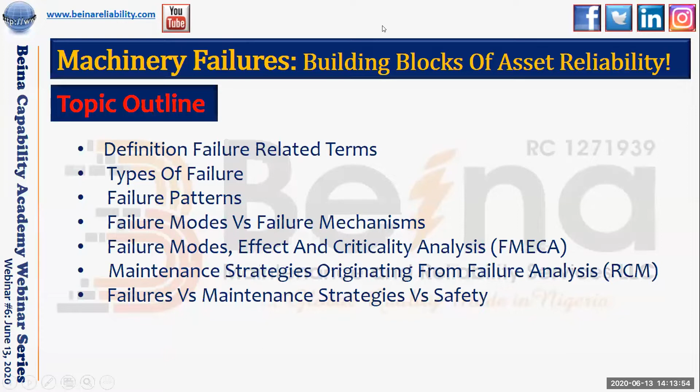Okay, failure: inability of an equipment to perform according to requirements. Somebody says loss of function. Somebody says failure is the loss of function of an asset. Failure is the inability of an equipment to meet demand. Good responses. The ability of machines not to pass NDT. Good, good, good, good. Okay, let's proceed.

What is failure? Failure is the inability of an asset to perform one or more of its intended function. The inability of an asset to perform one or more of its intended function.

Now, let's go to function. Function is defined as the purpose for which an asset is designed. This is first defined by the OEM, but most often redefined by the user. By the way, OEM means original equipment manufacturer, or better still, you could say designer.

So an asset can be said to have failed only if it is unable to perform its intended function as defined or as determined by the user of the asset. What do I mean? Now, I am a designer and I designed a bicycle. For my design, I have designed that bicycle to carry just one person. Now, you as a user buy my bicycle and you say, no, I don't want to use this bicycle to carry one person, I want to use it to carry two people. Now the function of that asset has changed because the designer designed the bicycle to carry one person, but you are using it to carry two people. So your expectation from the bicycle is that you are able to carry two people, right? So until you get to a point where you are unable to carry two people on that bicycle, you will not say the bicycle has failed. I don't know if I'm making sense.

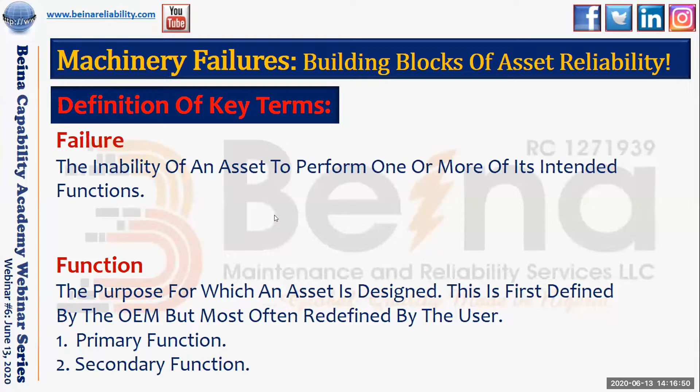I have two phones. I have a Nokia 3310 and I have a Samsung S20. For me, my Nokia 3310 is for phone calls.

But my Samsung S20 is for photographs and for social media. I want to be able to take photographs with my Samsung S20. I want to be able to surf the internet with my Samsung S20. Now, if I am unable to make phone calls with my Samsung S20, it doesn't matter to me because that is not the function of the Samsung S20 as defined by me.

Yes, Samsung S20 has the capability for phone calls as designed by the manufacturer. But for me, I bought this Samsung S20 so I can be able to take photographs and I can be able to surf the internet. So until I am unable to take photographs with my Samsung S20 or I am unable to surf the internet with my Samsung S20, I cannot say my Samsung S20 has failed.

I believe I'm communicating. Now, for my Nokia 3310, the primary function of my Nokia 3310 is to be able to make phone calls. So as far as I'm making phone calls with my 3310, everything is fine. The only time I can say my 3310 Nokia has failed is when I am unable to make phone calls with it.

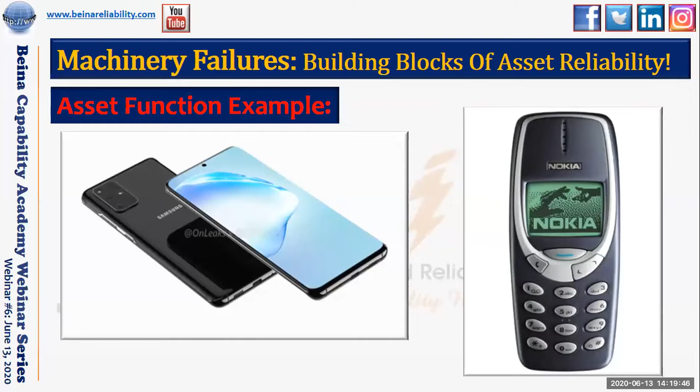What is reliability? Reliability is defined to be the probability that the component, system, or asset will perform its required function as defined by the user. Note the word user. User is coming in now. For a given period of time under stated operating conditions. If you look at the definition, three areas are highlighted. Let me use my cursor to highlight this. Three areas are highlighted: required function as defined by the user, period of time, and then operating conditions.

It is absolutely impossible to define reliability without these terms. So you can define reliability anyhow you want, but these three terms must be part of the definition: required function as defined by the user, period of time, and then operating conditions. Now, these acronyms, MTTF and MTBF, are measures of reliability. We're going to see them as we proceed in our definitions.

Now, the reliability of an asset can be achieved throughout the equipment life cycle. That is from design stage to fabrication, to installation, to operation and maintenance, and to decommissioning. And we must note that decommissioning does not necessarily mean the end of life of an asset. An asset can be decommissioned from point A and reinstalled in point B. Very important to note. So when we say an asset is being decommissioned, it does not necessarily mean that the asset is no longer useful or has come to its end of life.

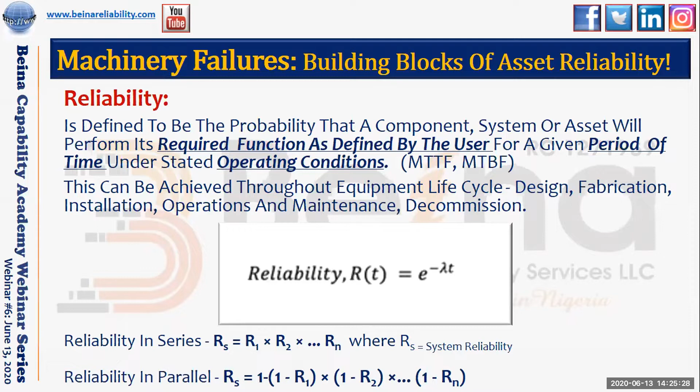Okay, failure rate. Failure rate is defined as the number of failures per unit time. And failure rate is also known as lambda. Whenever you see lambda in reliability, they are making reference to failure rate. And this is the mathematical model for failure rate: number of failures divided by total operating time. Very important. And failure rate could also be the inverse of mean time between failure, we're going to see this later, or inverse of mean time to failure.

Let's look at this example. 20 air conditioning units designed for use in NASA space shuttles operated for 1,000 hours. One failed after 200 hours and another failed after 600 hours. Now, we are going to be looking at failure rate in percentage and failure rate in number.

Now, for failure rate in percentage, you're going to look at the number of failures, which is 2, divided by number of units in the experiment, or number of units under test, or number of units in the mission, which is 20. Then you multiply by 100 to make it a percentage. So 2 divided by 20 multiplied by 100 is going to give you 10%. So the failure rate of this system in percentage is 10%.

Now, failure rate in number. 2 here is number of failures, divided by 20,000, which is 20 units multiplied by 1,000 hours. So this is supposed to be your total operating time, but you cannot just use this as total operating time, because you started with 20 air conditioning units, but you did not end with 20 air conditioning units, because 2 air conditioning units failed before the end of mission, or end of experiment, or end of test.

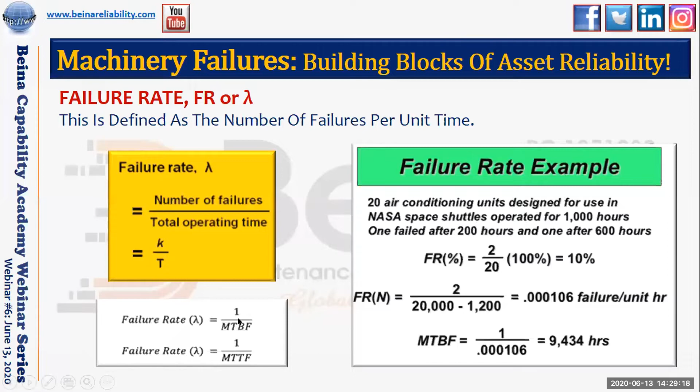Number of failures divided by total operating time is failure rate. And failure rate is equal to inverse of mean time between failure and inverse of mean time to failure. I'm going to explain the difference between this and this as we proceed. Okay, now mean time between failure. This represents the average time between failure events over a specific period of time. What this means is, in the next 10 hours, how many times does this asset fail?

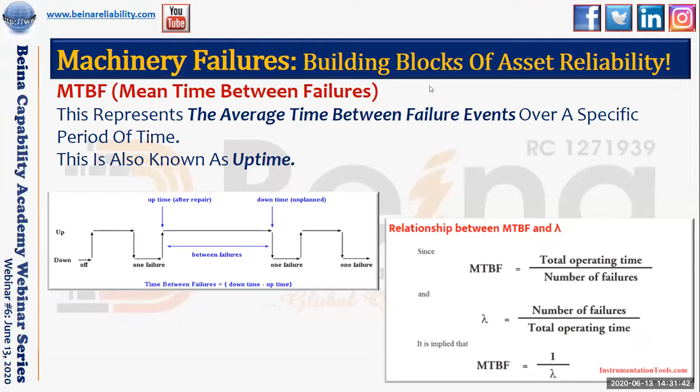Mean time to failure. Mean time to failure represents how long a machine is expected to run before it fails. Now, let me explain the difference between mean time between failure and mean time to failure. The difference is that mean time between failure is used for only assets that are maintainable, while mean time to failure is used for assets that are not maintainable or not repairable. Or better still, mean time to failure can only find application for assets that have only one mission life.

What does this mean? Your light bulb now, if your light bulb goes bad, you cannot repair it and fix it back. So the end of life for that asset, your bulb, is when it fails. That is why you can see from the formula here, total operating time divided by number of failures. But this time around, number of failures is equal to 1, because you cannot have more than one failure, because you cannot repair the asset. You cannot fix the asset and bring it back to operation. So after one failure, the mission of that asset ends, and that asset has come to the end of life.

Just like your rockets, mortar rockets, for example, they have just one life. After their mission, they end. It comes to an end of life. But thanks to Elon Musk, who has made a very outstanding invention of rockets that can go, execute a mission, and still come back to Earth.

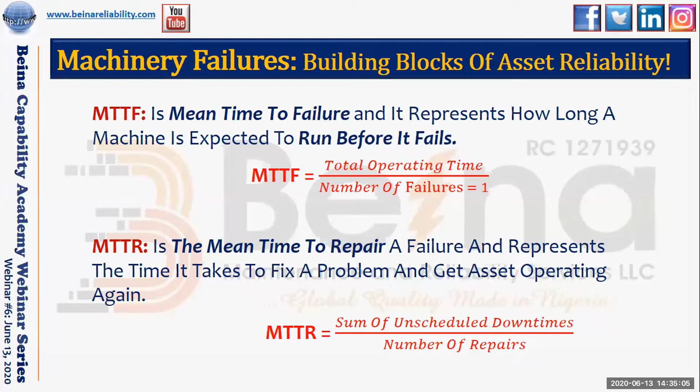Okay, availability. Availability is defined as the probability that a component or system is available to perform its expected function at a given point in time, t, when required. Very important. There's a difference between this definition and the definition of reliability. Most people tend to mix it up. This is measured at a given time t, while reliability is measured over a period of time. It's very important to note this.

I need to start my machine. I want to always come and push the start button and my machine responds appropriately. But when I push my start button and the machine does not respond, I cannot say that machine is not reliable. It may not be available at that point in time t, but I cannot say it is not reliable. I don't know if this is clear.

So availability is equal to uptime divided by total time, and can also be given as mean uptime. Remember, I talked about mean uptime in my explanation of MTBF. Mean uptime simply means mean time between failure, divided by mean uptime plus mean downtime. I talked about mean downtime also in my explanation of MTBF. So it's also given as MTBF divided by MTBF plus MDT. MDT means mean downtime. Very important to note.

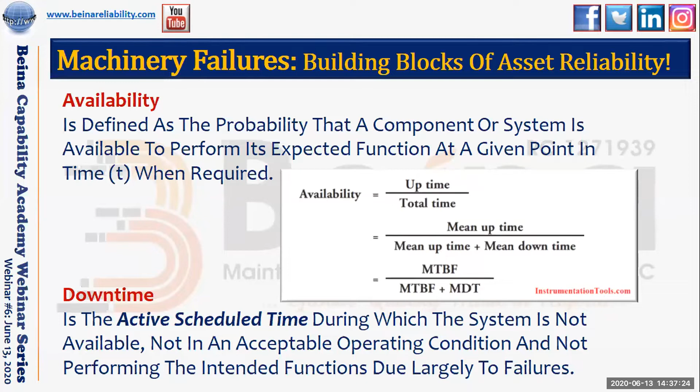Then downtime is the active scheduled time during which the system is not available, not in an acceptable operating condition, and not performing the intended functions due largely to failures. What this means is that I have scheduled my asset to run for 18 hours. So the active scheduled time for that asset to run is 18 hours. So anything that makes that asset not run within that active scheduled time, or any stoppage of that asset within that time, is what is called downtime. And this is largely caused by failures. I hope this is clear.

Let's proceed. Types of failure. In my last webinar, I breezed through these types of failure and I used an example. I will still use the same example today, maybe the example of my phone. Now, we have 4 major types of failures. We have inherent failures, potential failures, functional failures, and fatal failures. Some people call it total fatal failures, some call it catastrophic failures. Whatever you want to call it, at this point your asset has totally broken down.

So let's look at inherent failures, here at this point. Now, this graphic is trying to show us the condition of an asset over time. Now, here is the point where failure starts to occur. This failure is not necessarily age-related.

For example, I just bought a phone today, brand new S20. Fantastic. Everything is working. But it's possible that there is a component in that S20 that has begun to fail. I may not see it, I may not know it's there, but it is there, because over time it will show. And it may not necessarily be over time. It could happen immediately, just now, as I'm holding it. So inherent failures are failures that come by design. They are in there by design.

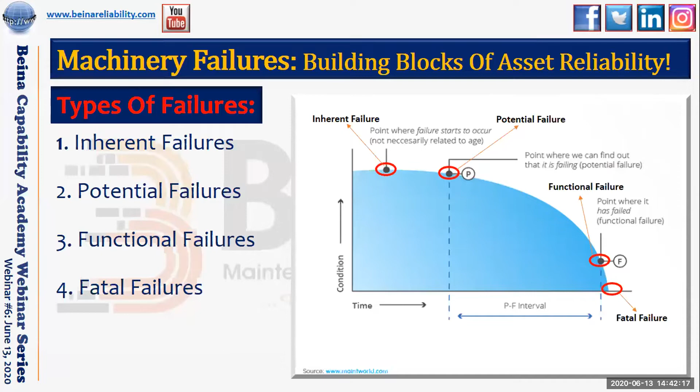So let's proceed. Failure patterns. Now we have 6 major failure patterns as discovered by Nowlan and Heap. These 6 failure patterns are the bathtub curve, the wear out failure pattern, the fatigue failure pattern, the initial break-in failure pattern, the random failure pattern, and the infant mortality failure pattern.

This means the majority of assets fall into one of these 6 failure patterns. The way your asset will fail, whatever kind of asset it is, falls within one of these 6. From here, you can see that the bathtub curve accounts for approximately 4% of failures. Wear out failure pattern accounts for approximately 2%. Fatigue accounts for approximately 5%. Initial break-in accounts for approximately 7%. Random failure pattern accounts for approximately 14%. Infant mortality failure pattern accounts for approximately 68% of failures.

I'm going to explain each of these failure patterns in the next slide, but let's look at this graphic here. Now, bathtub, wear out, and fatigue failure patterns are age-related, and they account for 11% of failures of different types of assets. While initial break-in period, random, and infant mortality account for 89% of failures, and they are non-age related.

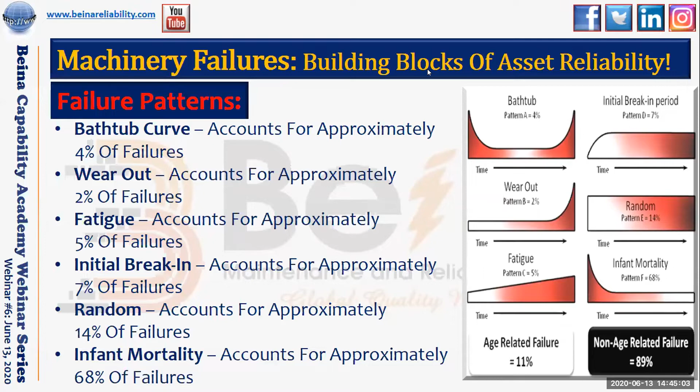Failure pattern A, our bathtub failure pattern, is known as the bathtub curve and has a high probability of failure when the equipment is new. At the beginning, the probability of failure is high. This stage is called the infant mortality stage. As you begin to use the asset, the probability of failure drops down and gets to a constant stage. At the end of life, there is a sharp increment in the failure probability, and it increases immediately. Only 4% of assets have this kind of failure pattern.

Now the next one is the wear out curve. It consists of a low level of random failures, followed by a sharp increase in failures at the end of its life. At the beginning of the life of the asset, failures are constant and can happen at random. But at the end of life, the failure probability goes high, meaning the failure rate increases. The failure rate before was 1, but it can be 2 or 3 at the end of life, meaning the asset is beginning to wear. This happens most times to mechanical assets due to wear and tear.

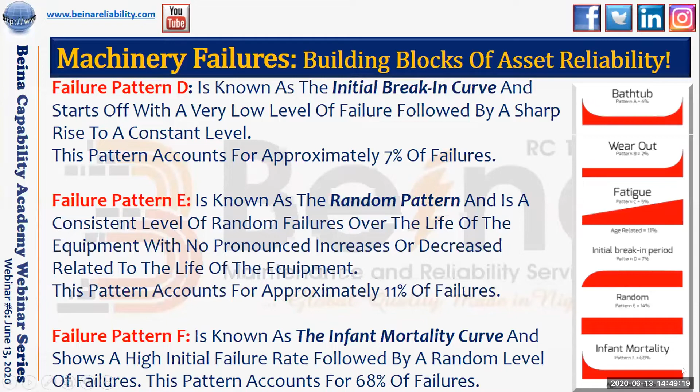Failure pattern F, known as the infant mortality curve, shows a high initial failure rate followed by a random level of failure. At the beginning of life, the failure rate or probability is high. As you use it over time, it gets to a constant level and remains constant throughout the life of the asset. This could also apply to electrical components or electrical assets. For example, if your asset does not fail at the beginning of its life, it means you will enjoy that asset till the end of life, like a television set. If at the beginning of life it doesn't fail, it will not fail over a period of time.

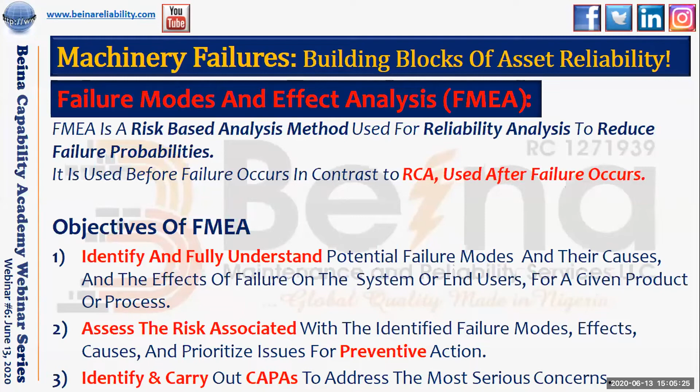So what are failure modes? We are going to FMEA proper. A failure mode is any event which potentially causes a functional failure. Remember, we've talked about function in the beginning, and we talked about failure in the beginning. So a failure mode is any event which potentially causes a functional failure. It is the best way to show the relationship and distinction between failed states and the event which causes them.

One of these ways to do this is to list functional failures first. So when I buy my phone and I define the function of this phone, remember from the beginning I said the function of my phone, my S20, is to be able to take photographs and to surf the internet. The function of the phone has been defined. So the only time I can say this phone has failed is when it is unable to let me take photographs or surf the internet. So for this S20 as an asset, functional failure is inability to take photographs, inability to surf the internet. That is functional failure as defined by me, the user.

Now, what are the things that can make my phone unable to surf the internet or take photographs? There could be plenty of them. Chief of them all is a cracked screen or a blank screen. When my screen is blank, that's the end. I cannot take photographs - if I try, I'm just wasting my time. I cannot surf the internet. So a blank screen is a failure mode that can cause functional failure.

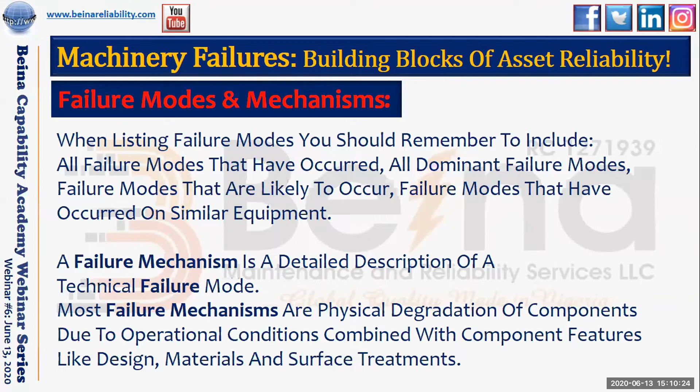So let's look at failure effect. Failure effect describes what happens when a specific failure occurs. So when describing a failure effect, the following should be considered: what evidence, if any, shows that the failure has occurred? For example, my screen again.

The only way I can know that my screen is blank is when I pick up my phone and try to unlock it and discover it is blank. I will know the failure has occurred. So it is an evidence. Blank screen is an evidence that this failure has occurred.

In what ways, if any, does it pose a threat to safety or the environment? That is for high-level machines that we use in the industries. In what ways, if any, does it affect production and operations? That is for those of us in operations and production. What physical damage, if any, is caused by the failure? Now we're talking about failure mechanisms. What must be done to repair the failure? So when talking about the effects of failure, you must consider these 5 points.

What is the first thing I will see to know that a failure has occurred, or this failure mode has occurred? It's very important, you must define this. It should be described in such a way to enable the maintenance team or operators to evidently see or know that a certain failure has occurred.

For example, physical evidence like beacon lights. Most of our machines in the industries have beacon lights. When there is a failure, you don't need to be on the machine to know that there is a failure. Some of the beacons will begin to show red lights. Some show blue when they are okay, or blue when on standby, and green when they are running. So from afar, when you see a red light on the beacon, you already know that something is wrong with this machine.

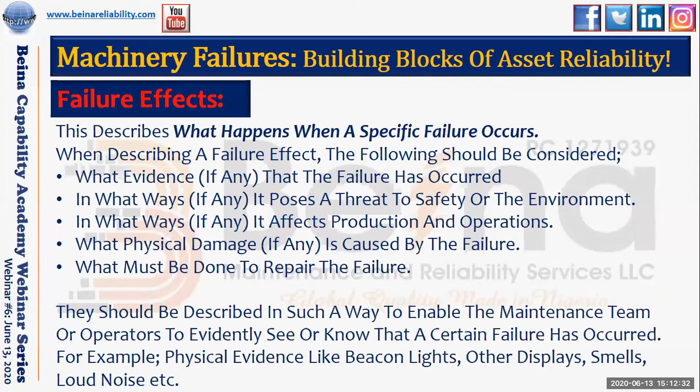That is one way to know that the failure has occurred. Other displays include smell and loud noise, but I will not encourage relying on smell and loud noise, because by the time it gets to that, the deed has already been done. And remember, we are trying to avoid this from even happening in the first place.

So, criticality analysis. In my previous webinar I talked about criticality analysis. This is one way to streamline failure modes, so you can focus mainly on failure modes with very high priority, or high RPN number. RPN numbers - let me explain what RPN numbers are.

RPN means risk priority number, and it is a multiplication of severity, occurrence, and detection. What does this mean? If this failure mode occurs, how severe will it be? Will it lead to fatality? Will it lead to loss of production? Will it lead to loss of economic value and all that? That is how you measure severity, on a scale of 1 to 10, how severe will this failure be if this failure mode occurs?

Occurrence is the likelihood or frequency of failure. How frequent will this occur, or how frequent does this occur? On a scale of 1 to 10 you give the value. And then detection: can I see how detectable is this failure before it occurs? If I can detect it, on a scale of 1 to 10, I'll give it 5 or 10 for high detectability. If I cannot detect it, I give it 1, for example.

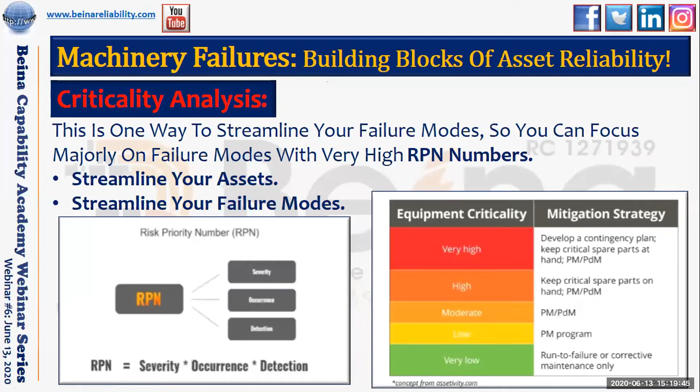So what you have succeeded in doing is putting up mitigation strategies that have reduced the risk level of a potential failure from very high to low. I believe this is clear. So that is the reason why I just added this slide. So let's proceed. So what is RCM?

RCM is a technique used to determine the right maintenance strategies that will address failure modes and their effects, leading to higher availability and reliability and reduced risk and cost level. First of all, it is a risk-based cost-saving methodology you use to determine the most suitable maintenance strategy for your assets. In my previous webinar, I mentioned clearly that it is wrong practice to have generic maintenance strategy for all your assets. And the reason is because all your assets do not have the same failure modes.

So you are going to treat your assets dependent on the type of failure modes your assets have. So the maintenance strategy you should apply for your assets should be a function of the types of failure modes that are peculiar to that asset. That is why it is very wrong practice to have a generic maintenance strategy for your asset. That is the reason why RCM is coming here. So RCM is just an addition of FMEA plus what we call RCM logic. We're going to see it soon.

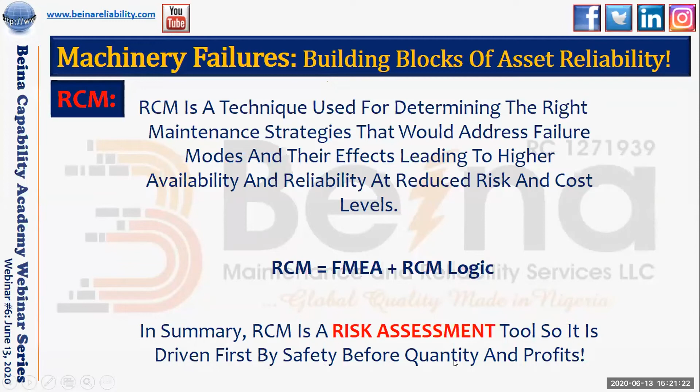So in summary, RCM is a risk assessment tool. So it is driven first by safety before quantity and profit. Very key. Okay, so for RCM process, we've talked about almost everything here, but I'm going to just highlight it and rush to 6 and 7, which is the main focus.

Remember, we talked about what are the functions of your asset. At the beginning, you determine the expectations from the asset as the user, and then set performance standards. That's where you determine your primary functions and secondary functions, as the case may be. The next is, in what ways can it fail to meet functions? That's where you're talking about functional failures. Then the next, number 3, is what causes each functional failure. That's where you're talking about failure modes.

The next step is what happens when each failure occurs. That is where you're talking about failure effects. We've talked about that. In what way does each failure matter? That is failure consequences. If this failure happens, what do I stand to lose? Will there be fatality?

Will there be a loss of a machine? Whatever it is, you need to determine what the consequence of that failure is. Now, if you do from number 1 to 5, what you have succeeded in doing is carrying out FMEA. Then number 6, this is where RCM logic comes to play.

After you determine what is the failure mode, what are the effects, what are the consequences of the failure mode, the next thing is, what should I do to predict or prevent this failure? This is where you are beginning to think of the best or most suitable maintenance strategy or mitigation plan. Mind you, your maintenance strategies, whatever it is, are supposed to be mitigative plans to ensure that you preserve the function of your assets. Very key. So number 6 is, what should I do to predict or to prevent the failure? When you start asking yourself these questions, what you are doing is what we call RCM logic.

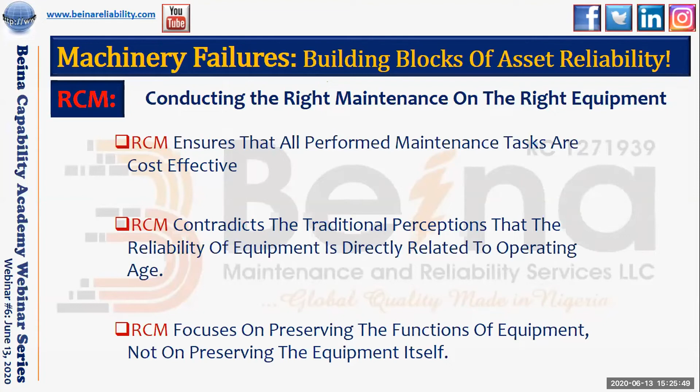As an engineer, as a maintenance engineer, as a reliability engineer, as an operations manager, as a plant manager, operations director, your job should be focused on preserving the function of the asset and not preserving the asset itself. What does this mean? You can preserve the asset and not preserve the function of the asset. It is possible, but it is impossible to preserve the function of the asset and not end up preserving the asset. And this is largely dependent on what you have defined the function of the asset to be. This is very key.

Okay, so let's proceed. I know I'm already running out of time, but I'll try to round up. This is very broad, and most likely we will do a part 2 of this as Beina decides.

So RCM can be looked at in 2 ways. Let me bring out my cursor. You can look at RCM as a system, and you can also look at RCM for a component-based approach. You can look at it as function-based approach for systems and component-based approach for components. Let's look at it for function-based approach. First is to identify the system and the boundary limits. What is the system in question? The system in question here is my phone.

What are the performance standards of this phone? This is where you come to system functions. What I'm expecting from the phone. What is the function of the phone as determined by me? The next step is identify system functional failures. In what ways or when can I say this phone has failed? I'm determining the functional failures of the phone. The next thing is what? Identify the failure modes. In what ways can this fail? Failure modes and their causes. Causes now has to do with failure mechanisms and the affected machine components for components.

Then the next is to describe or document the failure effects. After I have done this, the next thing to do is what? Come up with a decision diagram. This decision diagram is what is called the RCM logic, where I will identify the failure consequence categories and select preventive maintenance tasks with crafts and frequencies.

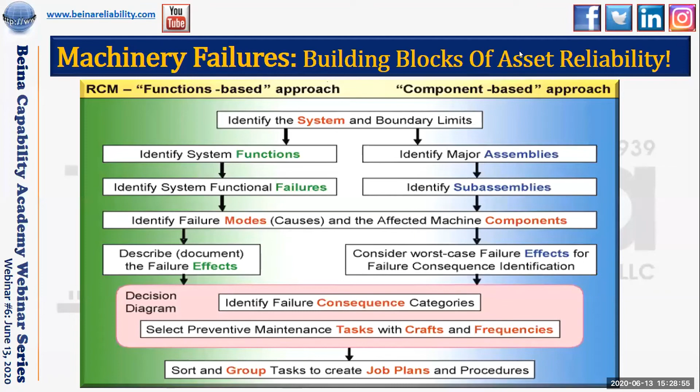So now still on RCM, failure analysis and maintenance strategy determination. The most appropriate equipment maintenance strategies can be determined by number one, the failure pattern that applies to a given failure mode. If you understand the failure pattern of an asset, you can determine which type of maintenance strategy to put in place to prevent that failure from occurring. Very important. That was why we talked about failure patterns in the beginning. So for whatever asset you have, you must sit down and understand the failure pattern of that asset.

Yes, you may not have enough failure data, but you can make research. Somebody has used that asset before you. You can ask questions around, okay, when you were using this asset, what is the failure history of this asset? So from the failure history of that asset, you can understand the failure pattern of that asset. And of course, when you understand the failure pattern of the asset, you can determine which maintenance strategy is best for that asset.

The next is mean time between failure. If you understand the mean time between failure of an asset, you can predict the next time an asset is likely to fail. And if you can predict the next time an asset is likely to fail, you will most likely be able to put systems in place to mitigate that failure. For example, maybe a preventive maintenance action, maybe change of oil, as the case may be.

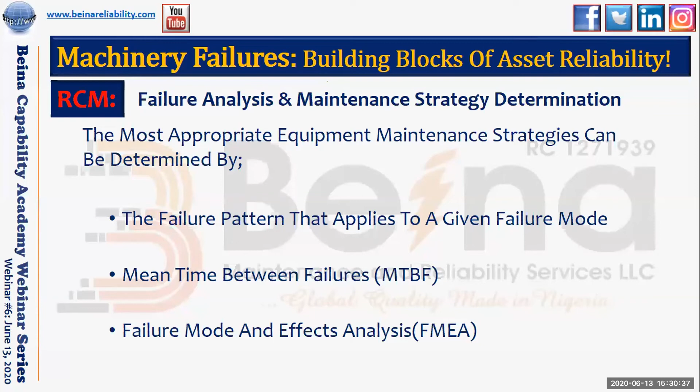Then the next is failure mode and effect analysis. We talked about it. If you carry out FMEA for an asset, you can be able from that FMEA to determine the maintenance strategy best fit for that asset, which is what is called RCM.

Okay, now let's look at these failures versus maintenance strategies versus safety. Still trying to use our PF curve to explain this, but it's a little dicey here. Here, the kind of maintenance you can do to catch this failure here, which is inherent failure, is what we call precision maintenance. Most of these maintenance activities are design related and can be applied during installation. When you do precision installation, you can catch this failure.

Let me bring out my cursor. You can catch this failure here. Precision installation, where you use laser alignment, you check for thermal growth, you check for pipe strain, etc. So when you do precision maintenance here, you can catch this failure here.

Here, because it is potential, it has started occurring and you can be able to detect it, maybe not with your physical eyes, but you can detect it with some tools like ultrasonic detectors, vibration analysis, oil analysis, as the case may be. You can detect with ultrasonic spike, you can detect with vibration analysis, you can detect with oil analysis.

So the kind of maintenance you can do to catch this failure here, potential failure, is what is called condition-based monitoring or condition-based maintenance / predictive monitoring. That is another talk for another day. There's a difference between CBM and predictive monitoring. They are not the same.

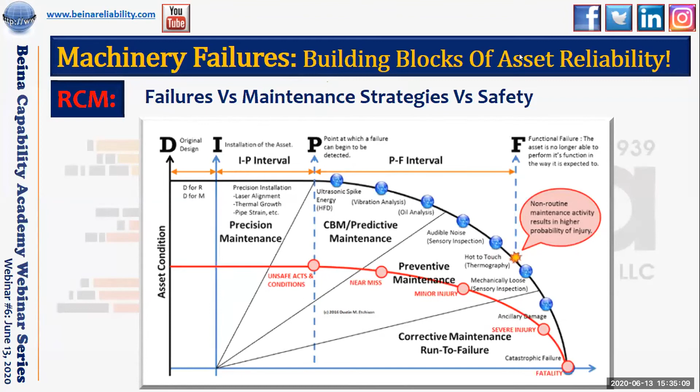Number two, failure is the starting point of system or component redesign. Now we have passed through the stage of design. The asset is already in use. But as I began to use the asset, I discovered that I always have issue in this area. And I have checked to see if I can fix this issue. I discovered that there is no predictive task that can fix this. There is no preventive task that can fix this. And I cannot run this to failure. So the best thing I can do is to redesign the asset.

I believe for those of us that work in industries, there are many times you will have to redesign assets. I've had to redesign some assets in the past when I was working as an automation engineer. When you reprogram a machine as an automation engineer, what you are doing is redesigning the machine.